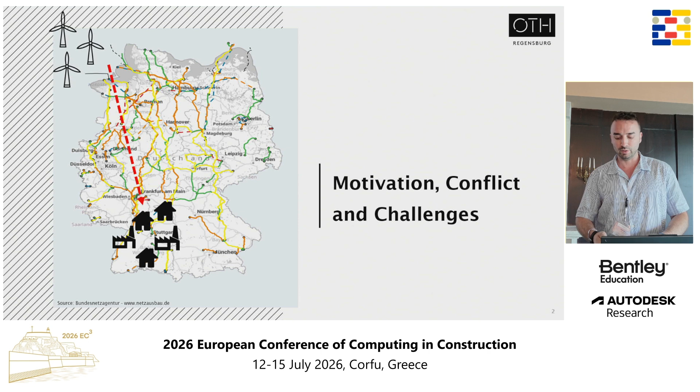The main idea is simple. A lot of electricity is produced in the north, especially from wind power, but it is needed in the south where the demand is higher than in the north. So the electricity has to be transported over long distances across the whole country.

And in the next step, I would like to show you why these conditions make planning for us as engineers so complex. First of all, these corridors are passing through very different types of areas, from rivers to cities to protected areas. And at the same time, the second point, there's a lot of time pressure. So the grid needs to be built quickly, but planning and approvals, as we already heard in presentations today, often take years. The third point is there are also technical challenges. Ground conditions change, there are many crossings, and there is no one solution that fits it all.

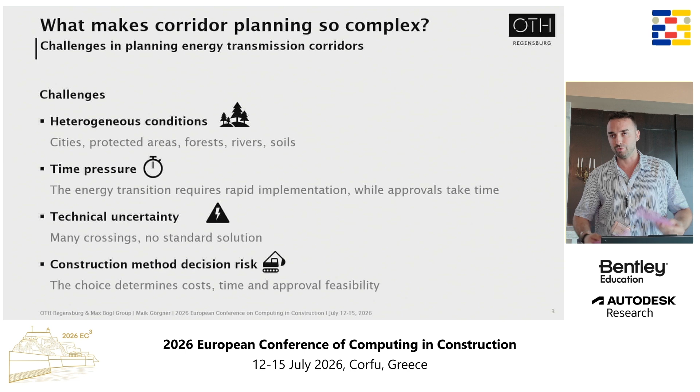The fourth point, finally, the choice of the construction method along the corridor is a key issue. It directly affects cost, time, and environmental impact. And this is exactly where one of the main challenges in this corridor planning lies. We will see later when it comes to my research why the link to the construction method is, for me and my research, a significant key.

So to give you a better idea of how these corridors are built and what I mean by construction methods, here you can see two typical examples. On the left side, open cut construction, where a trench is excavated and, let's say, to make it simple, the pipes are put in. And on the right side, a trenchless method like horizontal directional drilling, short HDD, which is used for crossings, for example, under rivers or under roads. So depending on the conditions, different construction methods are used.

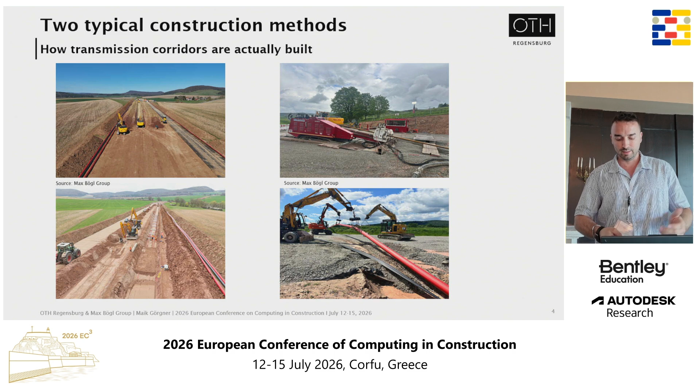But the question is, how do we actually decide this along the corridor? And this is where we run into a little problem. Because in this context, we are not talking about where the corridor is located. The corridor is already defined following years of planning. The key question is how we actually build it. After the corridor is fixed, the planning phase focuses on the execution, based on things like geodata, environmental rules, and geotechnical reports. But this information is quite general and abstract.

In the actual execution phase, so on the construction site, we need very concrete values. We need to know the exact method, we need the effort, the time, and the cost. And this is where the problem starts. There's no clear link between these two levels. As a result, planners, consultants, and especially construction companies have to go back and forth again and again during the execution. And this is exactly the gap my research addresses, the bridge between these two levels.

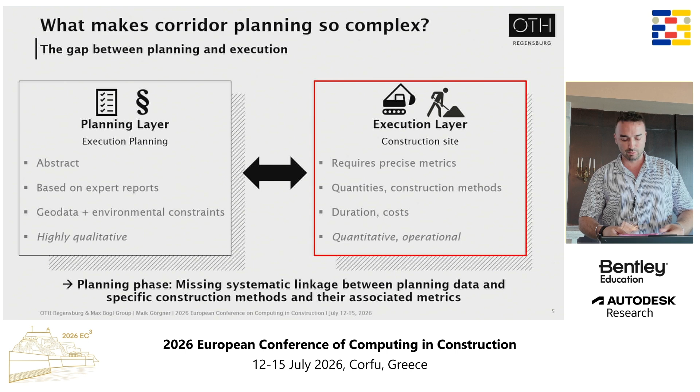The goal is to turn planning data into clear and measurable decisions by linking data, construction methods, cost, and time in a structured way. To understand what already exists in this area, let's take a look at the literature. If we look at the literature, we can see three main types of approaches. First, there are methods that compare different construction options and rank them. Second, there are rule-based approaches that check what is possible under given conditions. And third, there are more advanced methods that use optimization and sometimes look at individual segments.

But one thing is common to them all. Most decisions are still made for the whole project. They do not decide step by step along a long corridor, as we saw earlier with a corridor of 100 kilometers. They make decisions for the whole project. To make this more concrete, here are a few examples. Approaches such as Alinizzi and Lin focus on comparing and ranking alternatives.

Matthews already goes one step further and assigns methods along different corridor segments. This is already quite close to my idea. However, none of these approaches provides a complete solution for corridor-scale decision making. So the question is, what is still missing?

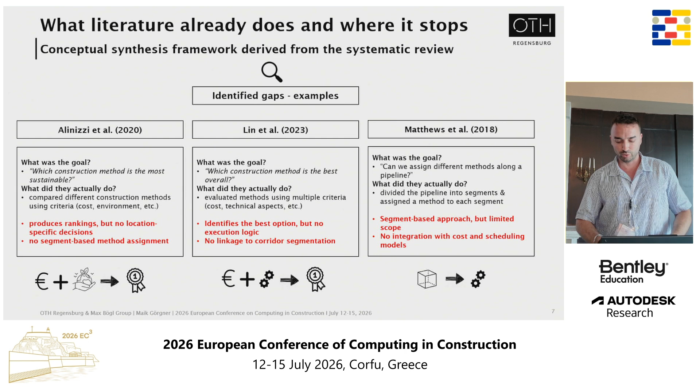When we summarize the gaps, most approaches still treat construction method selection as a project-level decision rather than a segment-level decision. In addition, there is usually no consistent logic that links planning data directly to construction methods. And finally, cost, time, resources, and digital planning tools are rarely integrated in these approaches. So as a result, they are difficult to apply in real projects.

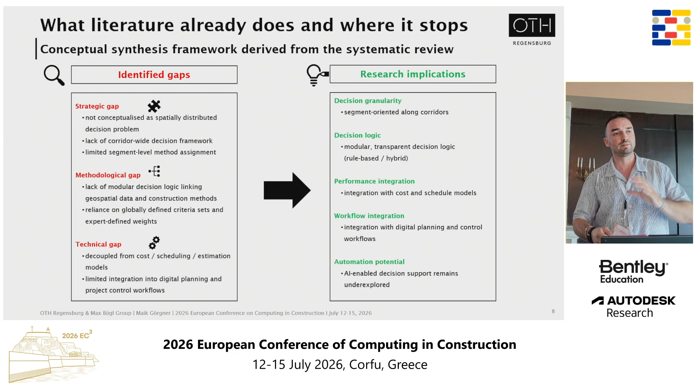These findings clearly show what is needed: a corridor-based approach, a transparent decision logic, and a direct link to cost and time, and maybe a time schedule. And this is exactly where my research starts. So based on these gaps, for me, the next step was clear. We now move from analysis to a possible solution. In the following, I will show you the main idea of my research and how it addresses the problems we have just seen.

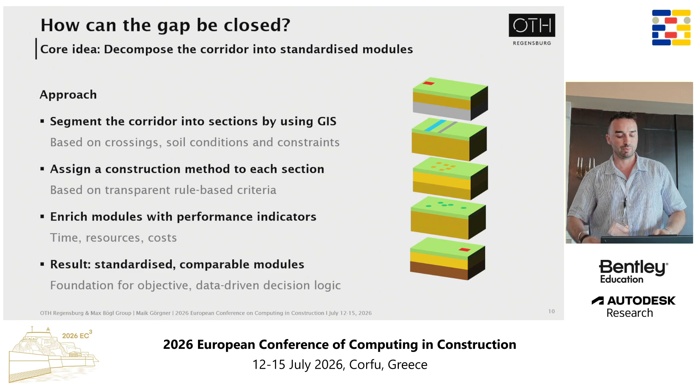The main idea, I think, is quite simple. We break down the corridor into smaller sections, in modules. Each section has clear conditions like soil, crossings, and surroundings. Based on this, we assign a suitable construction method. Then we add simple values like cost, time, and resources. In the end, we get a clear and comparable unit along the whole corridor.

So the key question, what exactly is a module? A module is basically one piece of the corridor where the conditions stay the same. This includes things like the ground, the geometry, and the construction method. For each module, we can then define things like cost and time. And the key point is that each module can be evaluated independently. This makes it possible to move from general ideas to clear and measurable decisions along the corridor.

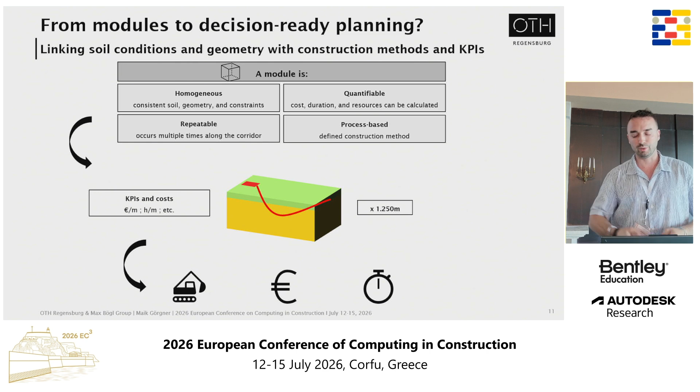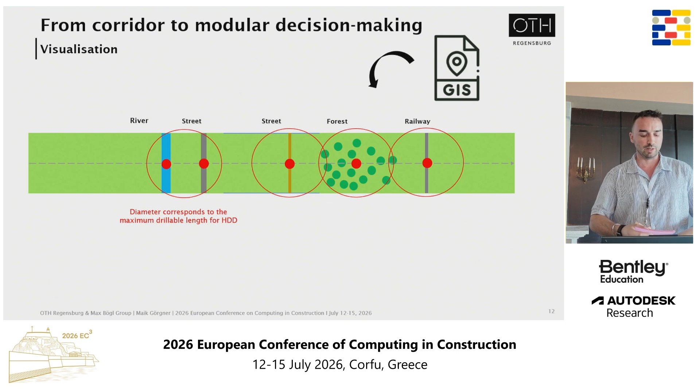So how do we get to these modules? Just in a visualization, we start with simple map data from GIS or OpenStreetMap. From this data, we can identify crossings along the corridor, like rivers, roads, or railroads. Then we group nearby crossings together based on technical limits, for example, the maximum drilling length. And this gives us the sections along a corridor.

Based on these sections, we decide how the corridor is built. In simple terms, the key question is, can we use open cut, as we already saw, or do we need to drill? And this is how the modules are defined along the corridor. To add, all of this happens automatically in just a few seconds, based only on the route in a map. So we only got a line, and all these modules are produced automatically within seconds.

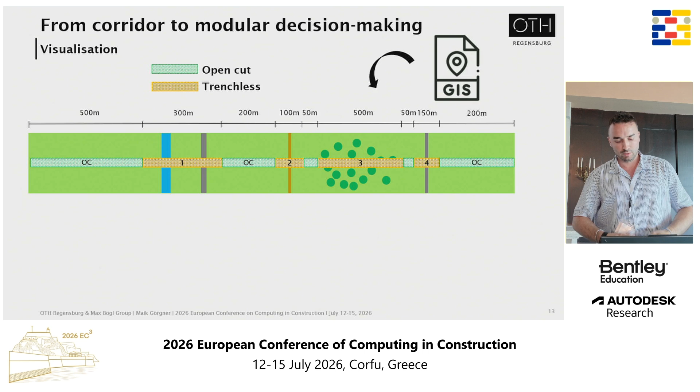This slide illustrates the whole picture of this concept. What we do next is to treat each of these modules as a separate decision unit. Each module combines the local conditions like ground and geometry with a clear way of building it, either open cut or drilling. This means we no longer look at the project as one big problem, but as many small and consistent decisions along the whole corridor. And because each module is clearly defined, we can link it directly to values like cost and time. This makes the whole process more structured, easier to compare, and scalable.

To wrap it up, what I presented today is a proof of concept for energy corridors. The bigger research question is whether this modular planning framework can be generalized to other infrastructure projects. I believe that modularization is a fundamental way to reduce complexity in big infrastructure projects. And my goal is to develop a generic framework that can be adapted in different domains.

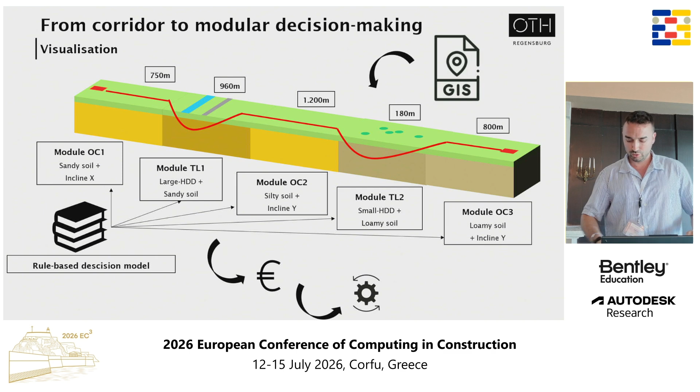So for the last slide, what does this research bring in the end? It helps to turn planning data into clear and measurable decisions. It creates a structured way to link data with how we actually build and with things like cost and time. This makes planning more transparent, more consistent, and easier to compare. In short, it helps to make better and more informed decisions along an infrastructure project.